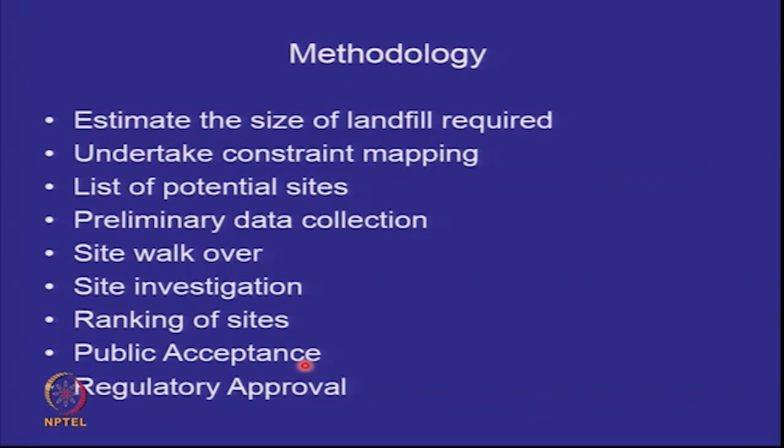If you have got sites, then you will do preliminary data collection, you will do a site walkover on each of these sites, you will do a site investigation to get some additional data, then you will do a ranking of the sites. And the site which scores the best marks in terms of acceptability should be adopted. You will have to go for a public consultative process, which is a big issue, because the moment you do a public consultation, you are involving the local people about the landfill, and public acceptance is a major issue, and then you have to get your regulatory approval.

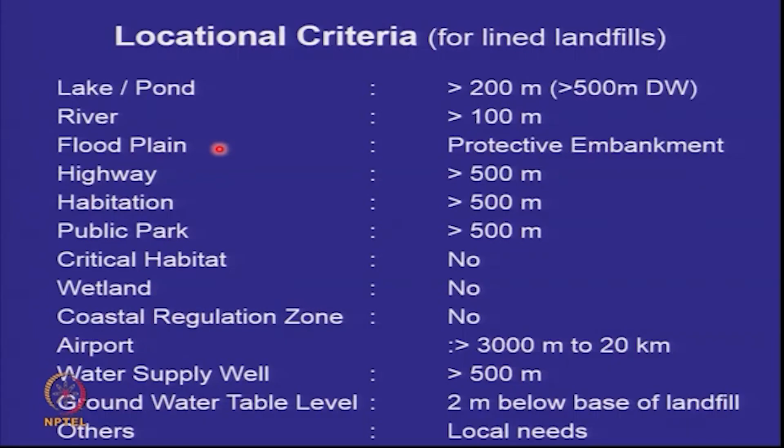So this is a locational criteria which we had discussed in the beginning. This is of course changing from time to time. The new 2016 rules have a slightly different criteria, but this is a good one to follow.

Now I am going to show you a work which was done by Mohit in his MTech. He did constraint mapping for a landfill for Allahabad division, not Allahabad city, not Allahabad district. A division comprises 3-4 districts. The concept was nobody was willing to give land for a landfill. So they said, okay, everything will be far off from the city. Can we have one site where the waste from all these 4 districts can come? That's the concept of a regional landfill.

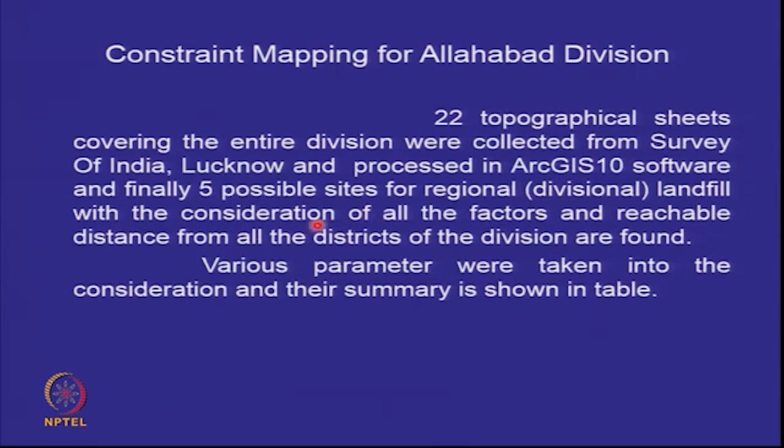Don't keep it close to your city. Don't try and reduce transportation costs, but make a huge dump somewhere remote where waste from different districts and cities can reach. So this is an exercise which they did, and they used GIS software, and they were able to identify 5 possible sites for the Allahabad division. So what did they do? Their constraint mapping criteria was different.

We have different criteria, but more or less similar. For example, they have added power lines. If you have a transmission line, you have to be 700 meters away from the transmission line. This is not in ours.

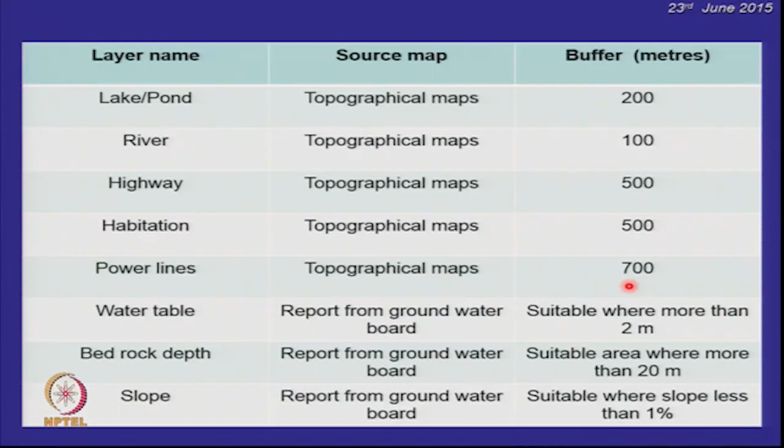So for each of these, for example, if you have a road, what is our constraint for the road? How near can we be? 500 meters if you have a highway. So if there's a highway which is going through, you are going to lose 500 meters on either side. So when they put all the constraints, there was transmission line, there was road, so all these colors are the constraint mapping. River, road, all that remained were these brown portions.

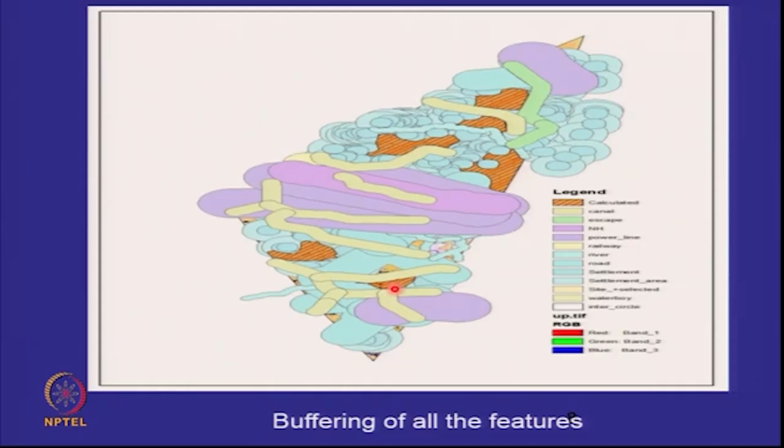So the constraint mapping throws up areas which are not coming under any buffer zone of any of the things: a river, pond, transmission line, road, habitation. Those are your 5 areas in that triangle which were acceptable to everybody. So now we have to find out which site to select.

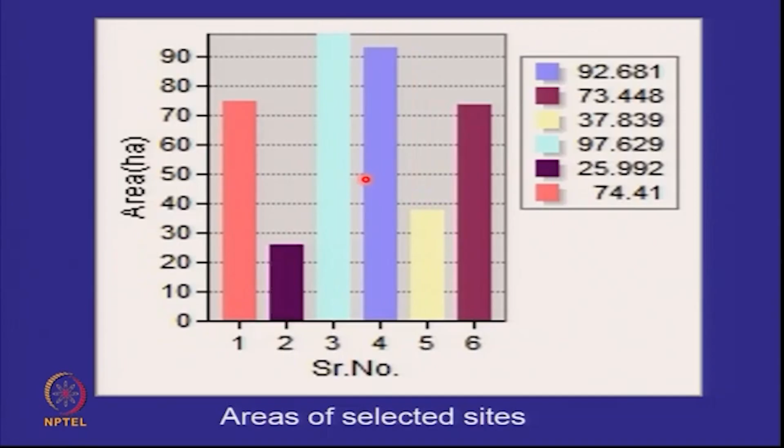So they went ahead and looked at the areas which were available, and you can see that site 3 had probably the maximum area, followed by site 4. And so now I have 5 or 6 sites. And if I have to select within these sites, I have to do a site ranking. So I go to each of the sites and start doing data collection so that I can then do site ranking.

So I need the topographic maps. I will not have very fine contour interval maps, but I'll have some coarse topographical maps from the Survey of India. I can get aerial photography from the National Remote Sensing Agency, or now even Google Earth will give you some kinds of maps.

We have soil maps of India, you would have heard about it, but as geotechnical engineers, I have never used a soil map. Why? Because the soil map is actually prepared for agricultural purposes. It is the surface soil map. So if somebody says this is the soil in this area, if you go 20 meters below, that's not the soil in that area. But if you want to grow a crop on it, then you can say, yes, on the surface, the top few inches or the top 1 meter, you'll have that soil.

So you can get an idea of the soil from the soil maps, get the geological maps from the Geological Survey of India, groundwater maps, at least you'll get an idea where the groundwater table is. Seismic zone 1, 2, 3, 4, you'll get from IMD or even the code. You need rainfall data. Is it a high rainfall? Is it flood prone? Is it low lying? So you can get that from the Indian Meteorological Department.

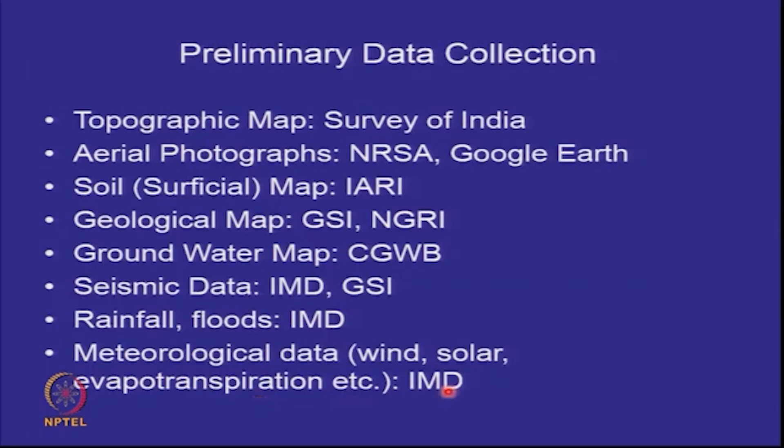I think floods will also come from the Central Water Commission. You may have some data with the Central Water Commission about the floods. And wind, solar data, evapotranspiration from IMD. Get this data for all the 5 sites. And then do a site walkover.

And when you go to a site, what do you want to go and see there first? Is it a flat ground? Is it sloping? Is it low-lying? Is it undulating? Is it hilly? Is it a valley or any other? So once you go to a site, you will get that immediate feeling. Then on your site walkover with the topographical map, you can say, okay, this is what it looks like.

See, site walkover is ground truthing. Some of the maps which you will see may have been old. Even the Google Earth photograph sometimes is how many months old? If you go to Google Earth, don't think you are seeing today's photograph.

Do you think you are seeing today's photograph on Google Earth? No. When you see terrain, it will be several months or a couple of years old. If you are a professional user, you will be able to pay and get the latest photographs for that area.

Look at the current land use. If it was irrigated cropland, it will go away in the buffer. But is it forest land? Is it wasteland? What kind of land is it?

The simplest thing to do is to find out about the groundwater table. Is there a well nearby? Look at the water depth. And depth of bedrock comes from tube wells. Sometimes your well may not be reaching the bedrock, but a tube well is taking out water from, say, 150 meters. He would normally tell you, before 150 meters, are we taking out the water from a weathered rock or are we taking out the water from soil? So you get information on bedrock.

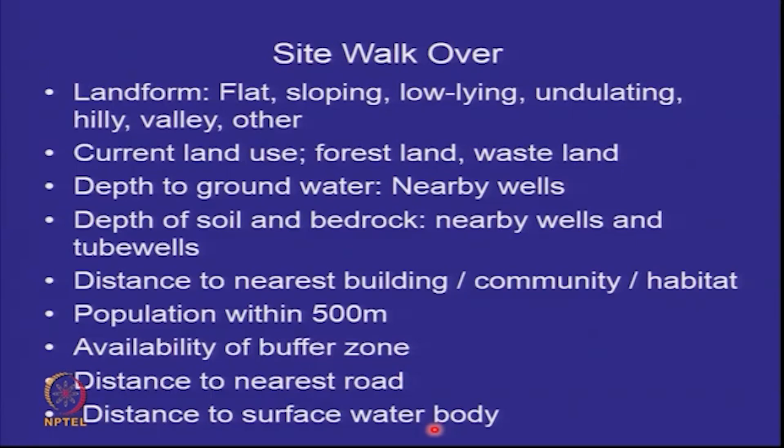Distance to the nearby road, distance to the nearby river or a lake or a pond. This is all from site walkover. Surface water drainage. Is it a well-drained site or is there water logging? You can find out. Are any drains, pakka drains, passing through that area?

The moment you have a drain, there's a constraint. The moment you have a transmission line tower, there's a constraint. The moment you have underground utilities, some pipe is passing, you will not be able to put your landfill on that pipe. So if it's an underground sewer line, or the water main for a city, you will not be allowed. So identify all this.

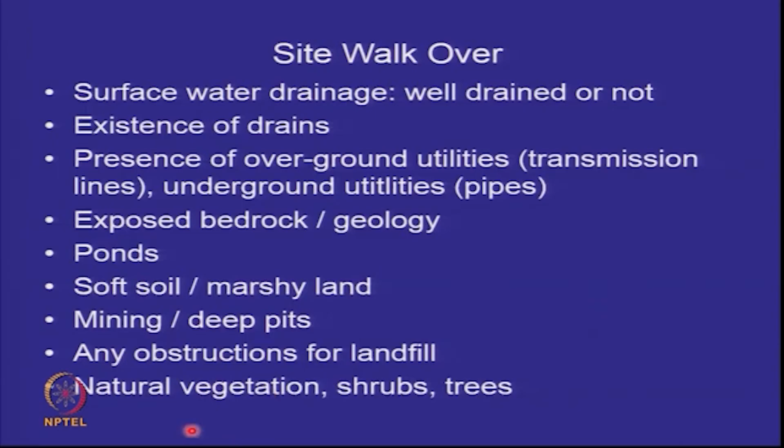If the bedrock is exposed, have a look at it. If there are some ponds, report it. Is it marshy land? Is that why it's lying empty, that nobody is using it? Marshy land normally means the water table is high, so you will have those issues with that. Are there any mining or deep pits? Any obstructions? And what is the natural vegetation? Is it arid? Is it shrubbery? Or is it densely vegetated? All this comes from the site walkover.

In addition to that, you have to do some site investigation. Now you have the topographical map from the Survey of India, but the contour intervals, I don't know what contour intervals did you get for the Allahabad division, do you recall? Eventually for your design, you are going to need a topographical map with contour intervals of 1 meter or half a meter. Right? And that's not what is going to be available to you from the Survey of India. It will be 10 meters or more.

So do your topographical survey, and at least drill 3 to 5 boreholes to understand what is below. Standing on the top, you cannot predict what is below. These 3 to 5 boreholes are only for the site selection. If you are going to do design, you will have to do 2 boreholes per hectare. So typically a landfill may require 10 to 15 boreholes for a detailed design.

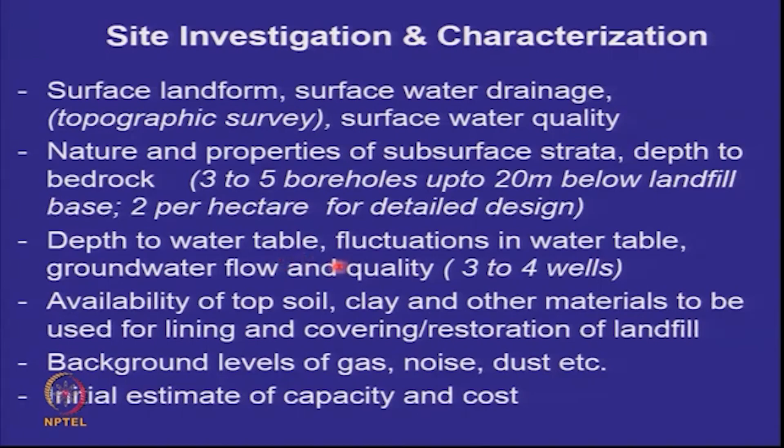For depth to water table and fluctuations, look at 3 to 4 wells. If 2 are already available, look at the groundwater fluctuations. Check about the availability of clay and other materials. Look at background levels of gas, noise, dust. You are also going to look at background levels of surface water quality and background levels of groundwater quality.

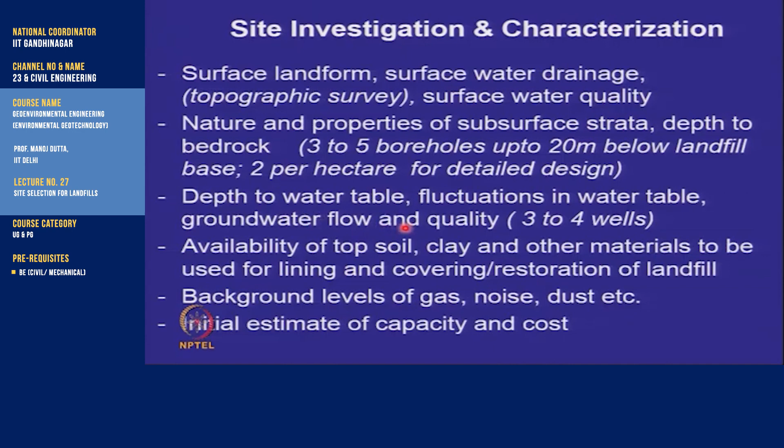If the groundwater is already saline, then your site is better for you to use because you are not putting a landfill on top of a drinking water source. So you have to get this data and get an idea. All landfill sizes will not be the same. The land available will have different shapes, different sizes. So look at the costs and the capacities that can be accommodated. With this, you can go ahead for site selection.

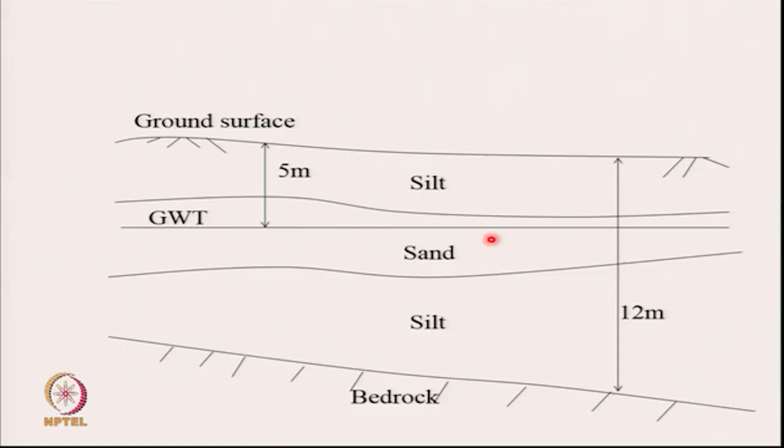So after you've done your site investigation, you will now have an idea what's below. Before that, you had an idea what is on the top. And at least you should be able to say that there are 2 or 3 types of soils. It's clay, silty, sandy. Is there a bedrock? Is there a groundwater table? You should be able to say all that. That's about it. Once you are able to have that subsurface information with you, your site selection is so much easier.

Now we have to have a methodology of ranking these 5 sites which we talked about. The Central Pollution Control Board in 2003 has come up with some guidelines, and this is one of the site ranking methodologies. If you go and look at literature, you will find other site ranking methodologies as well. So the Central Pollution Control Board says that there are 32 factors or attributes which have to be taken into account for ranking a site. 32. That's not small. And these are grouped into 7 categories.

And let's say cost is a category, environmental impact is a category, distance is a category. So you've got 7 categories, and all those categories are given a weightage in a scale of 1000. So you may give more weightage to cost, somebody else may give more weightage to environment. So a group of experts, this is not done on whims and fancies. So by using the opinion of a group of experts, you come out with these weightages. We'll look at these 7 categories.

But this 1000 may be divided up. If everything was equal, then it will be 1000 divided by 7. But everything is not equal in these categories, so different weightages arise. Within the category, now you have these 32 factors or attributes in 7 categories. So obviously each category has 5-6 attributes. To each attribute you have to give a weightage. So suppose one category had 200 points as the weightage, and within that there were 5 attributes, so you would have a tendency to give 40 to each, unless again a group of experts gives you a separate weightage.

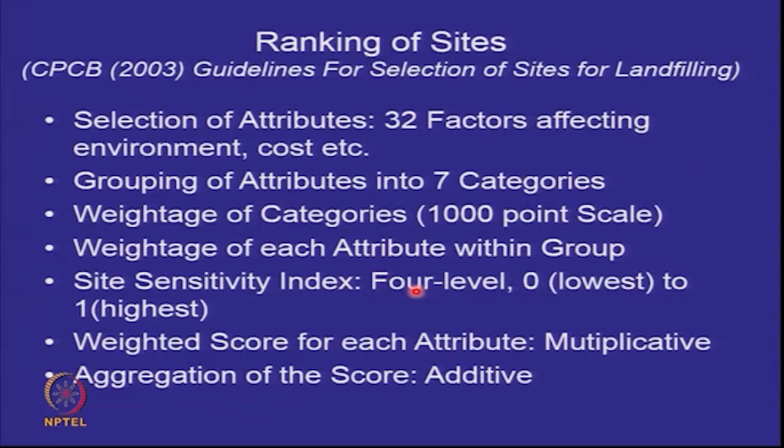Now, once you have given the sensitivity for that site, you multiply it with the weight and you add everything. Right? And we'll just quickly look at it in the next slides. So you have an attribute. The attribute has a weight. It has a site sensitivity depending on the data coming in from that site. You multiply that sensitivity with that weight for that site, and for all the 32, you do this and you add them and you'll get a score. You'll get a score between 0 and 1000. The ideal perfect dream site is 0, and the most horrible site is 1000, because the worst case scenario is 1 site sensitivity index.

Within the, for example, I talked about accessibility related 60 marks. There were 2 attributes: type of road passing nearby and distance from the collection point. So these are accessibility. So these are the weightages. This is 60. Receptor related: population, drinking water, nearest building, land use, property value, public utility, public acceptability. This is 250, and these are the breakups which are given.

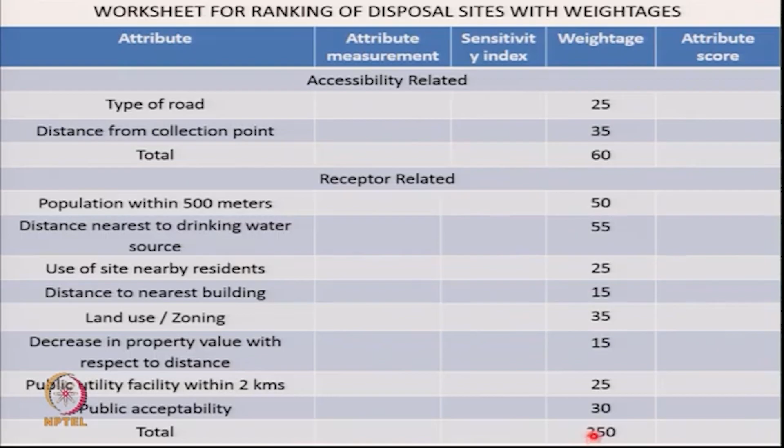Environmental related: is it critical habitat, distance to surface water, not drinking water, surface water, distance to river, distance to groundwater, contamination possibility, quality of water, quality of air, quality of soil. If it's already degraded, then the impact is less. If everything is pristine and you go into a very nice sanctuary, then obviously your impact is going to be much higher. But if you go to a place where already the air is degraded, like Delhi, well, then you're making a lesser impact. That's not an example to take.

Then socio-economic related: health, will this whole waste to energy, waste to landfilling, will it create jobs? Will the odor have issues with the local population? You know, odor can lead to headaches, it can lead to depression. Is the visibility of that, is it going to be an issue? So 110.

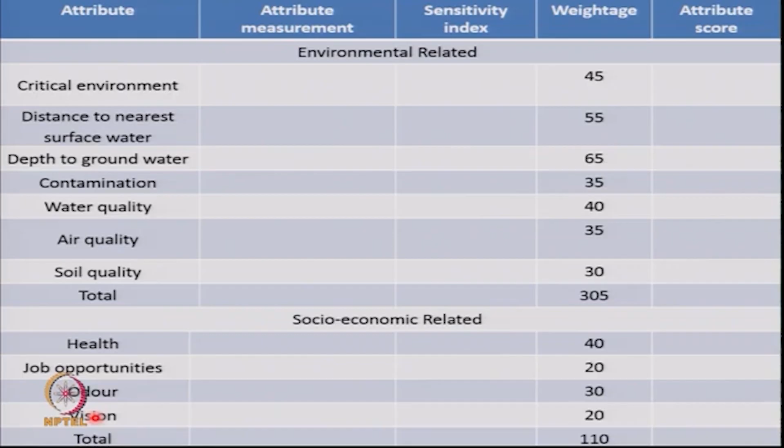Waste management related, what will be the life of the site, right? And what is the waste quantity per day it will accommodate? 85. Climatology, how much precipitation? Precipitation effectiveness index is the ratio of precipitation to evaporation. In arid climate, it will be very low. In wet climate, it will be very high. Climatic factors contributing to air pollution, it is 15.

And finally, the subsoil, where we geotech guys come in: the soil permeability, the depth to bedrock, erosion, characteristics of rock, is it weathered or massive, depth of soil layer, what is the slope of the ground, what is the seismicity of the area, 150. So if I want to go back and see which is the most important category here, which is the most important category? Environmental and receptor. These 2 guys get the highest marks.

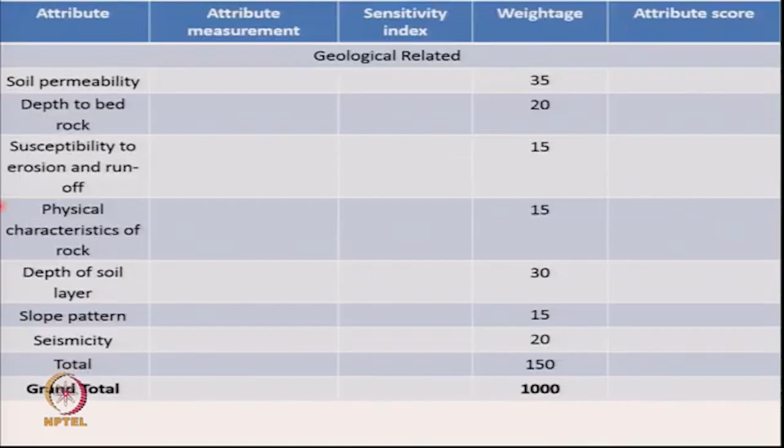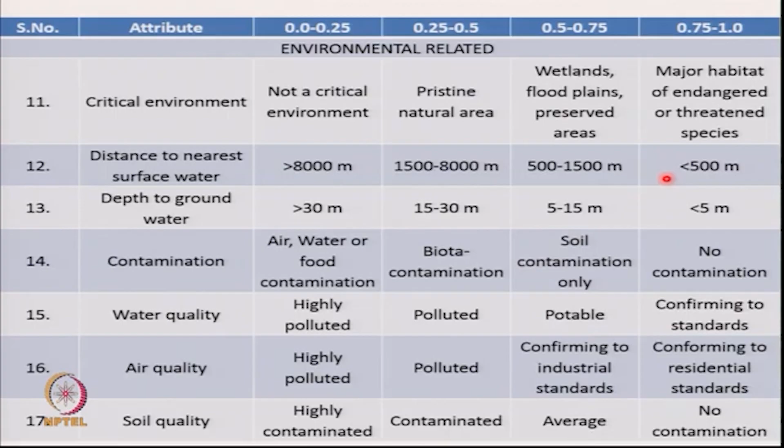Distance to nearest surface water, if it's 8 kilometers away, fine. If it is less than 500, your landfill site has got the buffer, but it still is close to a river. So that will give it a high index. So like that. So for each one of them, for example, if the soil permeability is less than 10 to the power of minus 7 centimeters per second, good site, it's like a clay barrier. But if it is greater than 10 to the power of minus 3, bad site, it's a pervious soil. Also, if the rock is massive, it's good. If the rock is weathered, not good, like that.

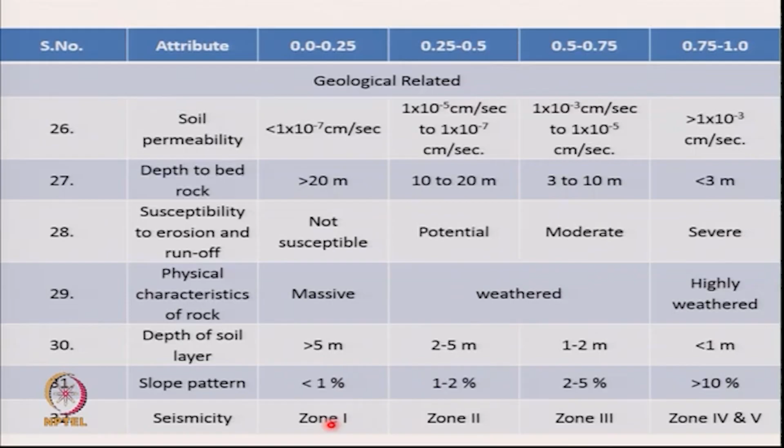If it's high slope, maybe there are slope stability issues, or maybe the leachate can come out and run down the slope for very large distances, those are the two issues. And of course, low seismicity area is fine, high seismicity areas are not fine. So let's take a case study to understand how this is applied. Now for each site, this is for a Bangalore site, so we are away now from the Allahabad selections. This is one site only I am doing in Bangalore.

I need this measurement, right? What is the type of road nearby? A state highway. What is the distance from the collection point? 25 kilometers. This is for that particular site. What is the population within 500 meters? 100. Distance to the nearest drinking water source? 200. Site not used by residents, 100 meters away, remote, no decrease in property value, no public utility, and there are no complaints from the public. So like that, this data has been collected.

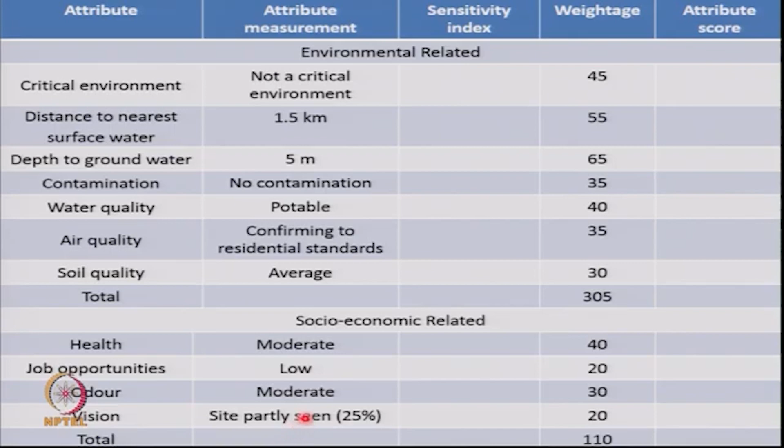It's not a critical environment. Distance to the nearest river or a pond or a lake is 1.5 kilometers. Depth to groundwater is 5 meters, and so on and so forth. The effect of the site on health is estimated as moderate. Job opportunities will be not very high. Odor will be moderate. Visibility: partly seen site. Precipitation index of Bangalore and climatic features, no problem.

So like this, the permeability is 10 to the power of minus 4 to 10 to the power of minus 5. Depth to bedrock 10 to 40 meters. Weathered rock 2%, zone 1. So these are the weightages. Now let us see, with this data, I am bringing back that first slide. Let's look at 25 kilometers. What sensitivity would you give to it? And let's look at the sensitivities recommended by Central Pollution Control Board. So for 25 kilometers, what is the site sensitivity index which you will adopt? Please tell me.

0.75, because this corresponds to this and this corresponds to this. Hopefully they'll adopt that. How much was the population within 500 meters? 100. How much would you adopt? 0.25.

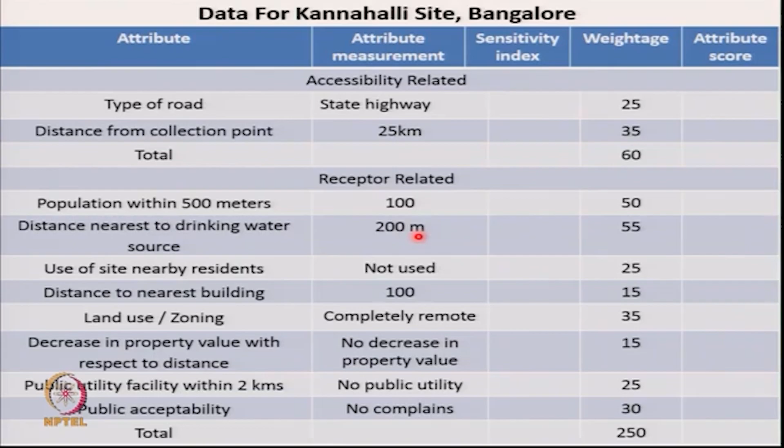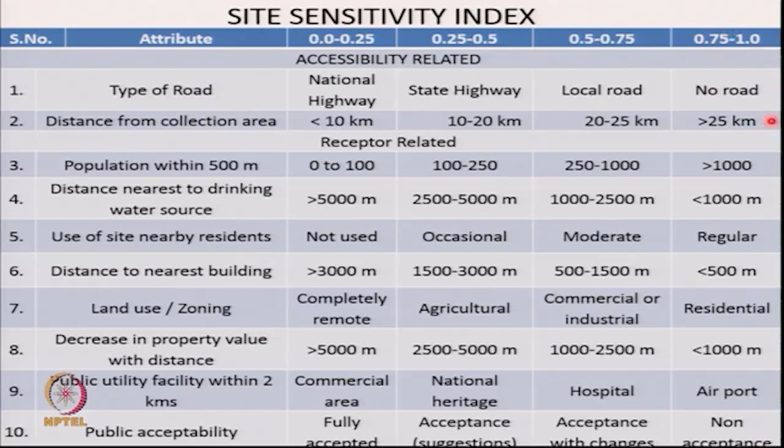And let me go to distance to nearest drinking water source, 200 meters. And here it says, he is talking of 5 kilometers. So ours will fall here. So 1. So let's see. 25 kilometers, 0.75. 100 people within 500 meters, 0.25. 200 meters, 1.

So now you will multiply this sensitivity index with this weightage to get this value. So if it was the worst site, it would have been 60, and if it was the best site, it would have been 0. For this site, if I add these two up, I get 35. Similarly, if I add this up, I get 87 out of 250. Okay? So a land use zoning completely remote, 0, no decrease, 0. So like that, I got the values and I multiplied them.

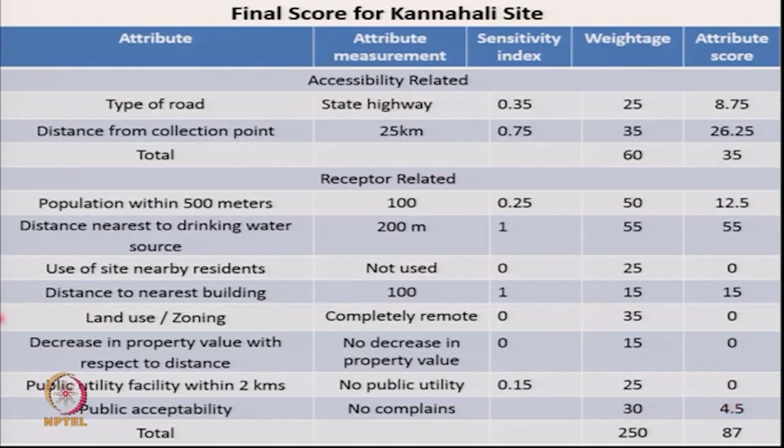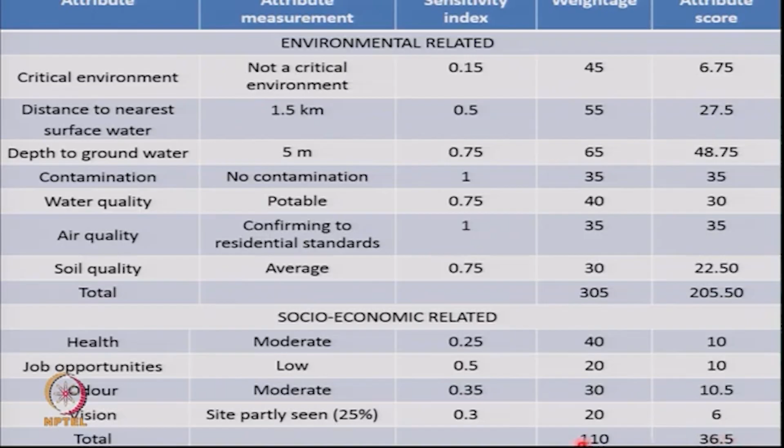Environmental related, you got these values, and in socio-economic related, I got these values. So here I got 205 out of 305, and here I got 36.5 out of 110, 21 months. Even that is very low by our standards, but it must have been a small site which has to be developed. We have talked about how much should be the minimum life of a landfill. 10 years is how many months? 120. So this is less than the critical size that we have adopted.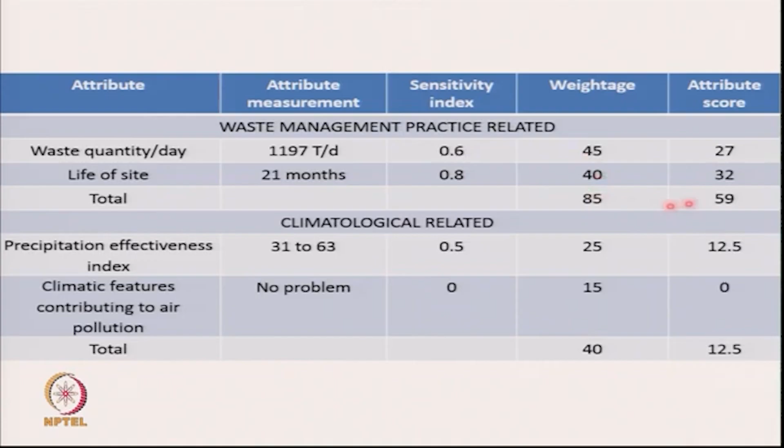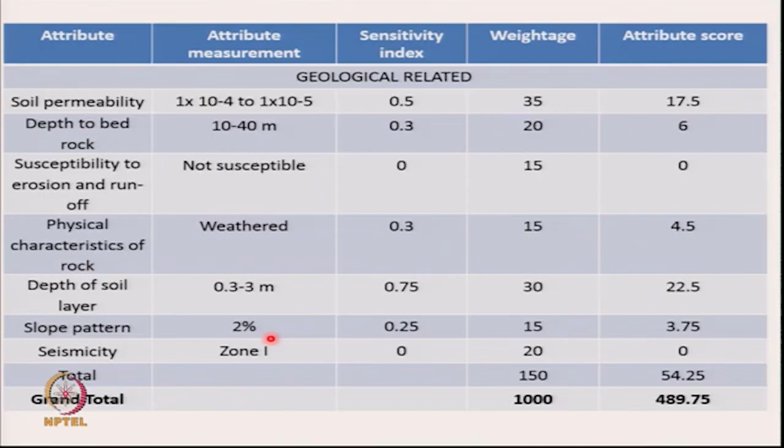In any case, so you are getting the values for each one of them, and in the end, when you add up all the score, you get 489.75. That's bang in the middle of the 0 to 1000 scale. So do you think the site is acceptable or not acceptable? Please note that these are relative ranking indices. So if you have 3 sites, then quite clearly the site with the lower score is better and the site with the higher score is not better.

However, if you are treating this as an absolute value, then we have to answer the question, do we accept this site or not? So typically, if you were to divide the 0 to 1000 scale into 3: not acceptable, acceptable, in between. So how would you make the grouping? You could do a linear grouping. 1000 divided by 3, 0 to 333, acceptable. 333 to 666, in between, you take the call, and 666 to 1000, not acceptable.

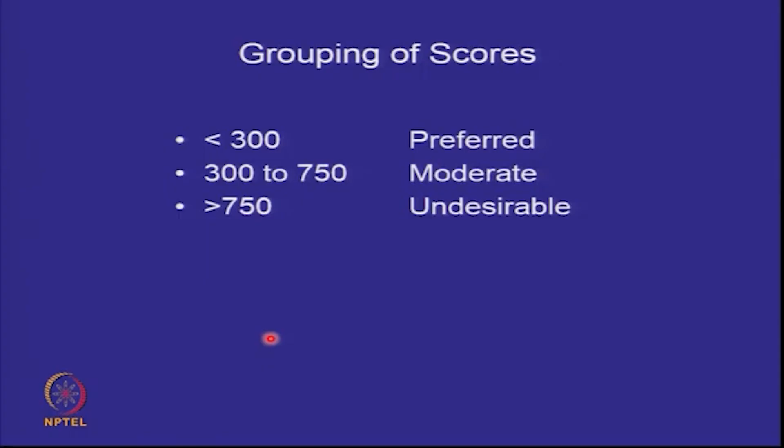So you need a scale. But remember, site ranking methodologies are for relative comparisons. Absolute scales that withstand scrutiny are difficult. However, in that document of the Central Pollution Control Board, this is what is listed. Less than 300, preferred site, take it. 300 to 750, a huge range, moderate, left to you to decide. If you have a better site, go for it. If you don't, perhaps you have to accept this. And greater than 750, undesirable. Therefore, it would be a moderately acceptable site. Compare it with 2 other sites and take your decision.